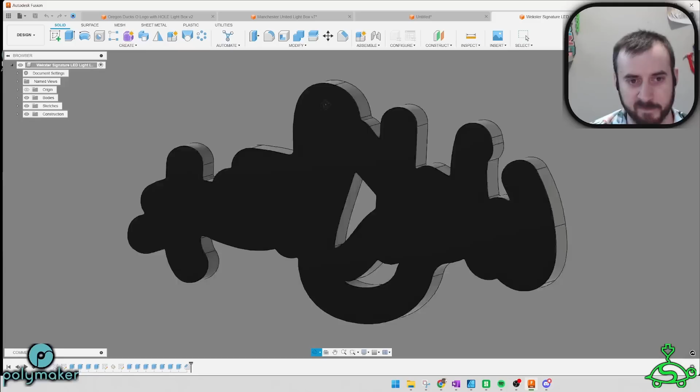The old Fusion. Here's the Wekster one, the one that I just had in my hands. You've probably seen this one from me, or there's another guy that's made one as well, basically identical to this.

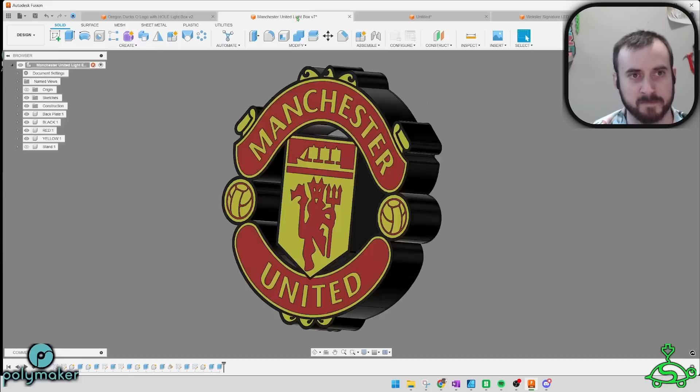And then the Oregon Ducks O - this is a pretty basic one, kind of similar to how I'll show you to make one today. This one, the Manchester United, was a royal pain in the butt because of the tolerance issues, and the more of these jagged edges, the harder it's going to be to get everything nice and perfect.

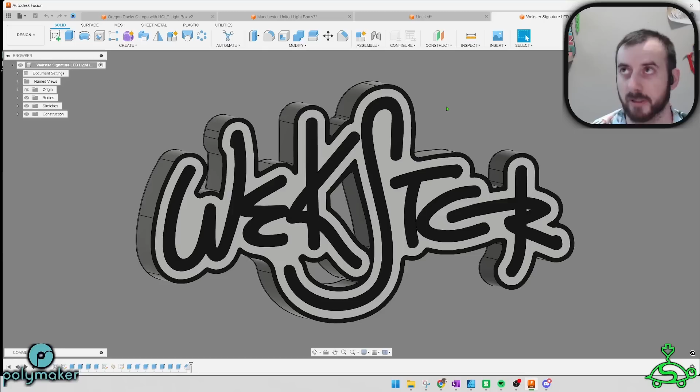So this may be a little more advanced - probably a new beginner on Fusion is not going to have fun doing this. I am going to show you how to do it on a very basic model though. This one was also not that easy, but it wasn't crazy hard. You'll be able to manage it if you really want to.

Let me show you this once again so you can understand what we're trying to accomplish here. What we want to do is essentially make the box a tunnel. In this one, you're going to have three quote unquote boxes - the outside box, this inside box, and then this inside box. If I take the back off and flip it around, you can see there are 3 boxes. I'm calling them boxes, but you know what I mean - 3 sets of walls: outside wall, this inner wall right here, and then the inner wall right here.

You need these to go all the way through, or else you're going to have light shining all over right here, and you're going to be able to see your LEDs, and it's going to look super weird. So this is the goal - to make a full pass-through light box.

And then this is the back plate, what it looks like. You'll have your normal lip on the back side, and then you'll also have lips for the boxes on the inside that you need to seal up. Trying hard to get this thing centered up in the camera, but this is what we're going for. So I'll show you a much easier, simplified way to do that.

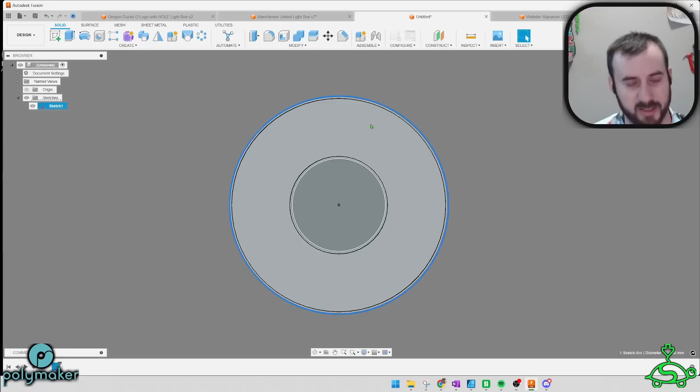This is basically just some circles I drew - this is just an example. And the biggest circle you want to go is 235 on the Bambu, because that's about the biggest you can get away with without getting into the calibration lines and such.

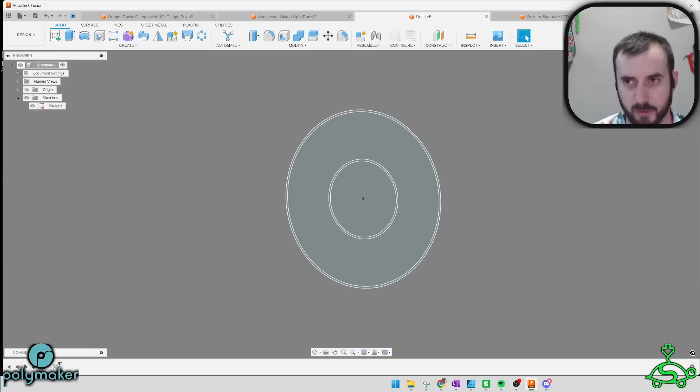So what we're going to do, I guess, is start out with the back plate first. I don't remember what I did first on the other ones that I showed you, if I did the back plate first or the front first, but we'll do the back plate first. So I'm going to select everything just like we do the normal light box, and then I'm going to hold shift and click the center because we're not going to extrude this center part.

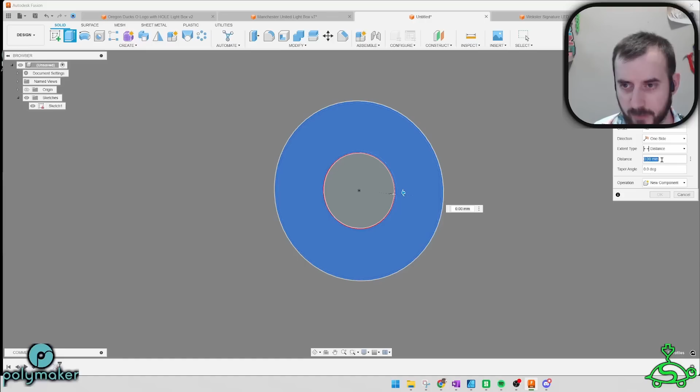I'm going to click E for extrude, and now we are ready to extrude. Then just like the regular light box, we're going to go offset and send it backwards 40 millimeters, so minus 40.

Then we're going to go new component and make this 2 millimeters thick. So this is the normal back plate, and we're going to name this back plate. Now we're going to turn the sketch back on.

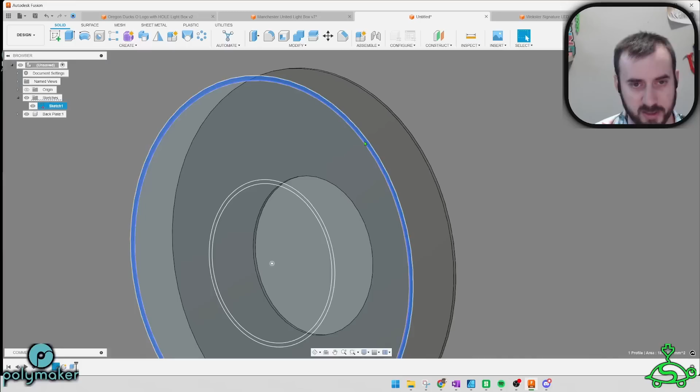I'm going to extrude my two walls just like I would a normal light box. I'll click the outer wall, hit extrude, the inner wall, hit extrude, and then go minus 38. Then I'm going to do new component. So minus 38, new component, click OK.

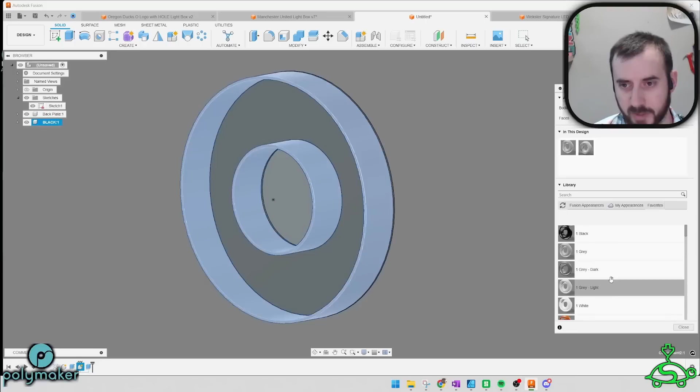This one we're going to name black because that's what color I want it to be. I'm going to scroll over here, drag my black material onto it, and get rid of the gray altogether.

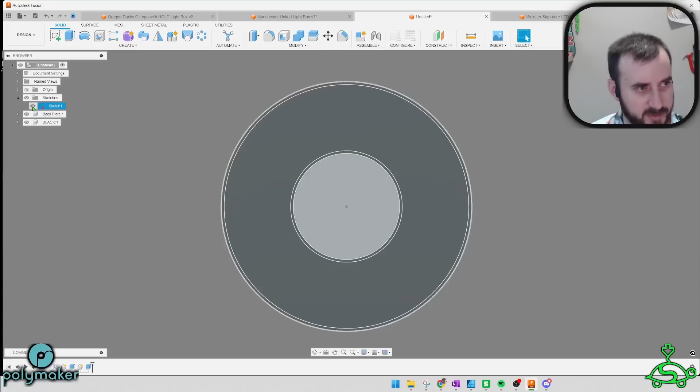Okay, so now we have the two boxes and then the back plate. So now we need to start making the lips for the back plate. I'm going to turn off sketch 1, which is at the front.

I'll turn it to the side so you can see the back plate behind here. I'm going to turn off the back plate. Yet again, just like the normal light box, I'm going to flip it around, click on the back side, and create sketch.

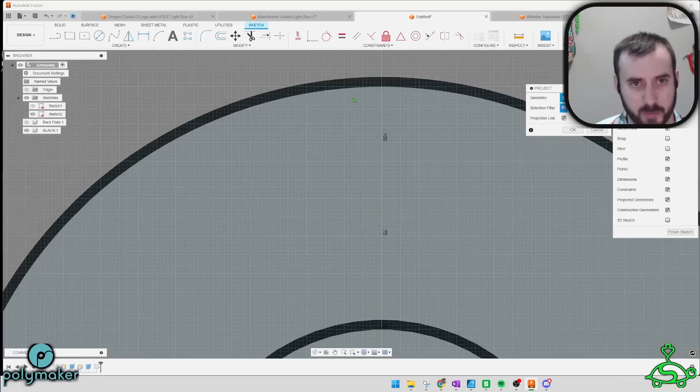Normally we're going to hit P for project, click this one, and we also have to click the inner box, so we have two. Now this is where you do your offset, so we'll click O for offset. We're going to do minus 2.5 so it goes to the inside, click enter, and then do the same offset for the other box, so 2.5.

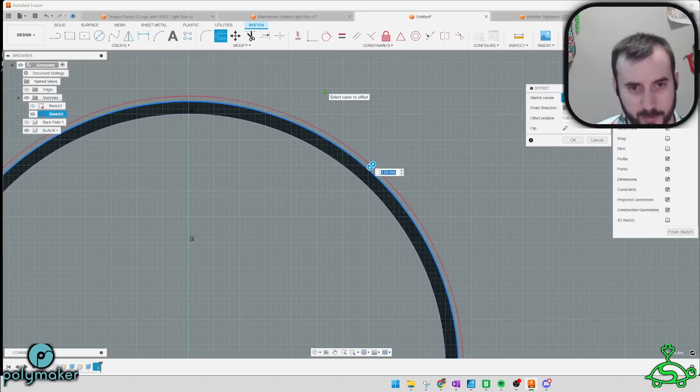So now we have our lip and lip for the back plate. Now we can finish sketch, and now we can turn off the black.

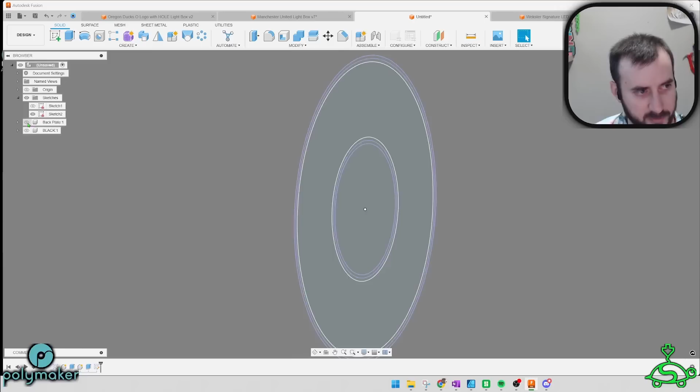Let me twist it to the side so you can see. We can turn off the black now that we have the sketch completed. Turn off the black, turn on the back plate, flip it back around to the front. And now we have our lip. I'm going to click extrude, and then we have our lip for this box.

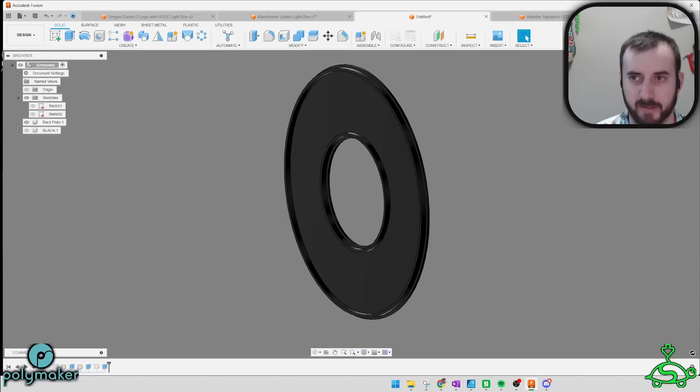And then minus 5, and we're going to want this to join. Okay, so now we have our two lips that are going to hold this light box into place.

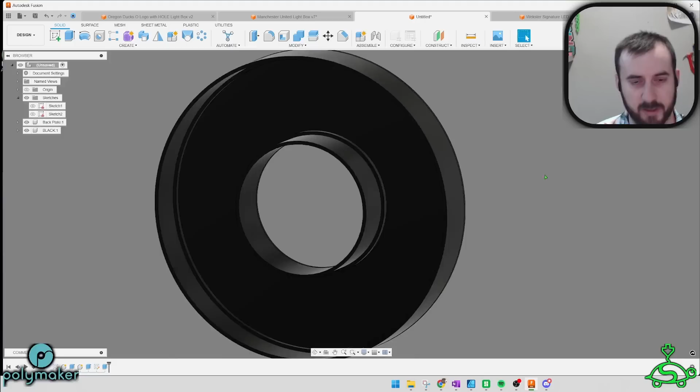So now I'll turn the black back on. You can see where this is going to slot in, so that'll be a smooth, flush inner diameter, and then it's going to be a flush outer diameter. If I flip this around, you can see it's nice and flush all the way around.

So now we have the back plate completed. We no longer need that visible. And now we can look at the front again, and now we can go back to doing whatever our design was.

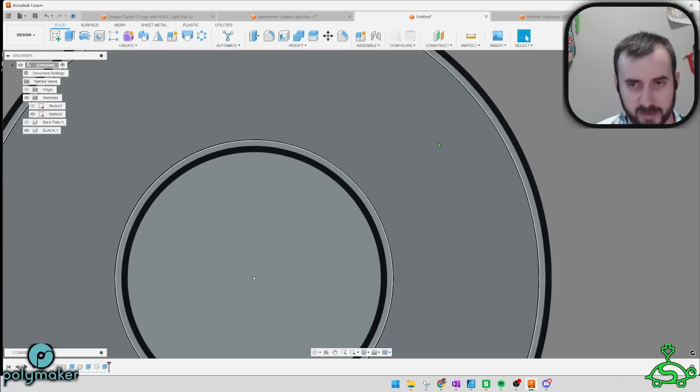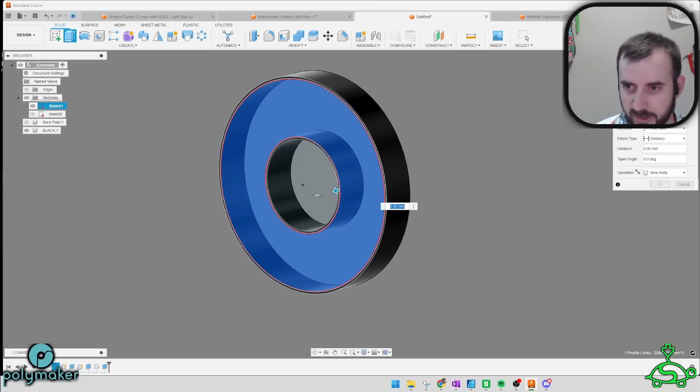So if this is just going to be a blank white design, we're going to click... Oh, I need to sketch 1 back. Sorry about that, sketch 2 is for the back plate. So I need to hide sketch 2, bring sketch 1 back into play, and we're going to click it. I'm going to go extrude, and then I'm going to go new body, minus 1.

Okay, and now this is going to be white. Now I need to hit A for appearance. I didn't say A earlier whenever I was coloring this, so hit A for appearance.

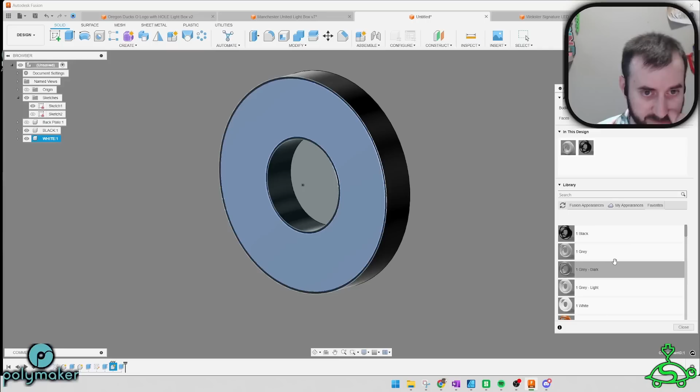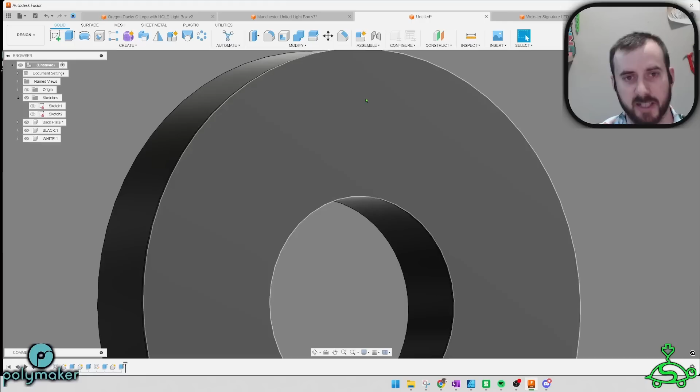Now we have basically a completed light box already. If I turn off that sketch, turn on the back plate—I don't have the wall hanger, the keyhole in the back of this, but you can put that in there anytime. But essentially you have a light box with a pass-through in it now. Just that simple.

And there it is, the donut light box. So now what you could do after this, if you don't already have a design on here, click on the front, create sketch. I'm just going to wing it from here. This isn't part of the pass-through tutorial, but I'll show you how to add stuff on here.

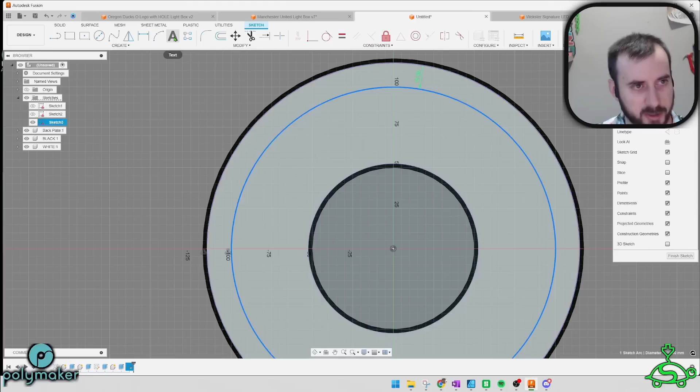Let's do Shurdle3D is where it be. Okay, now you can align these however you want.

If you wanted it to be lined up in the center, there's multiple ways you can do this. You could just simply force it like that. And you can see this line going across here, I have it perfectly right in the center.

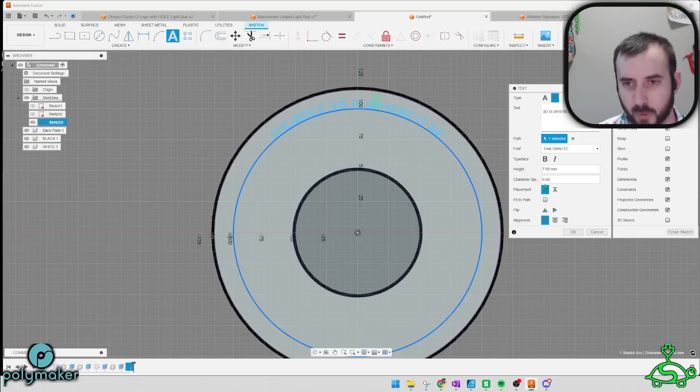Or if you want this text on the bottom of the circle, you can click this button right here. Bam.

There you go. So now you can also resize the text. Oh, that's a little large. Let's go 15 millimeters, that's pretty good right there.

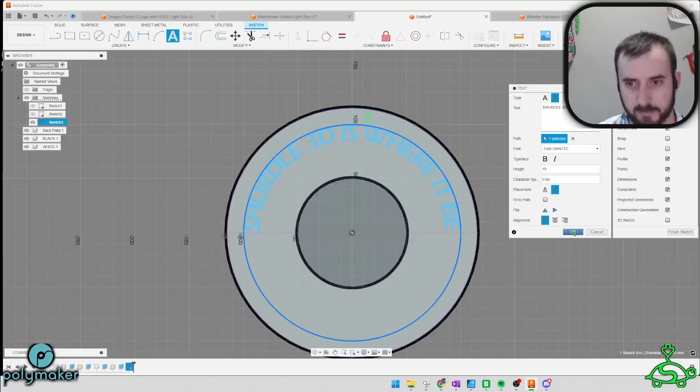We'll hit OK, finish sketch. And now what we can do is take this, extrude it, -1. We're going to cut it out.

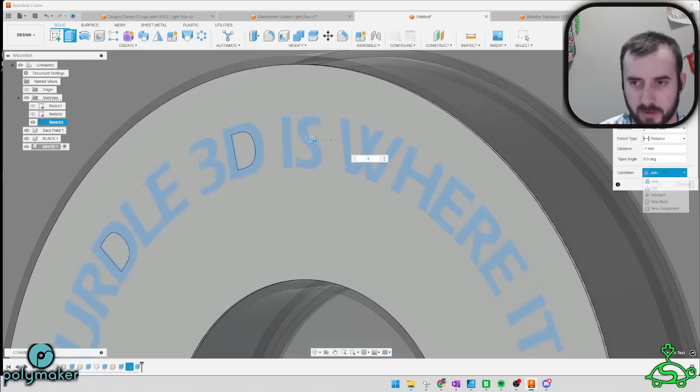Okay, turn the sketch back on. We can extrude this, -1 again. And we're going to go new component. We're going to call this text. All right, now I can turn the sketch off, and now we have a wheel with your text on it.

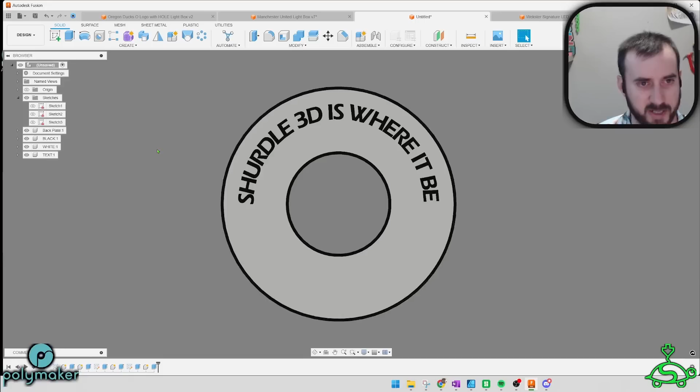And now all you got to do is just export these files into your slicer and then hit print. But in a nutshell, this is how you make a pass-through light box. This is the super duper easy version to do that.

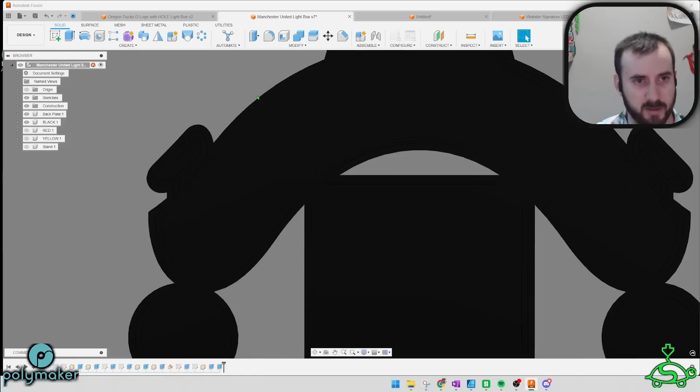If you want to come over here and compare yours to this Manchester United one, let's hide the red, hide the yellow. You can see how many walls I have and that I was fighting. This was not simple, it took me a couple of tries to get this one done correctly.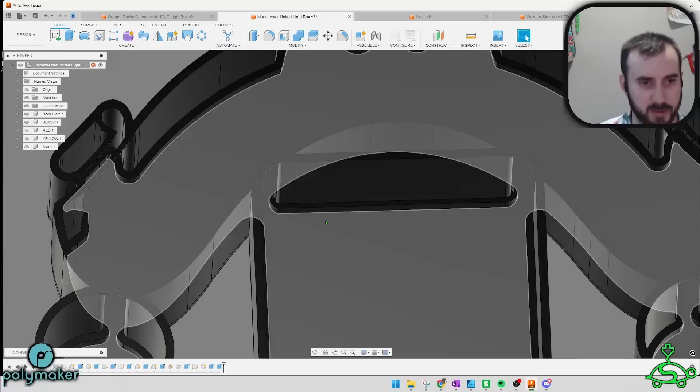You can see the lips everywhere, and then trying to get, you can see where I changed. I have a gap in the middle right here because I was fighting the fitment issues on some of these areas. So if your light box walls are too tight, that's one thing you can do is just change the width, your tolerance on the inner walls.

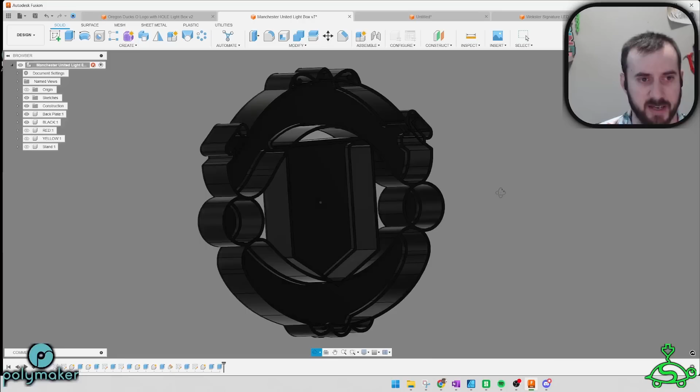You want to leave the outer walls perfectly snug. That way, whenever you slide it on there, it's nice and tight and will hold itself in place. But the inner walls, you can make the lip a little bit larger. That way there's no light bleeding through the backside, like so.

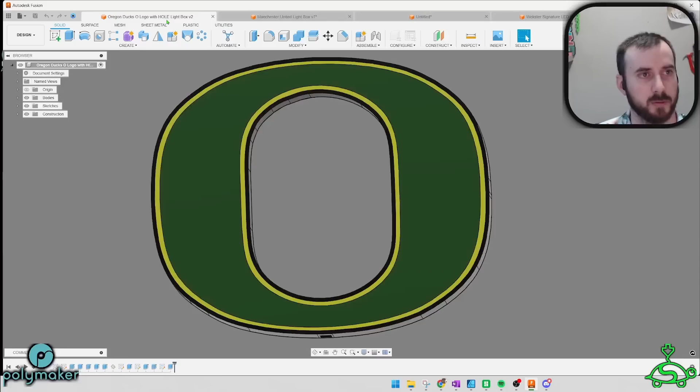Okay, so Oregon Ducks, I'll show you what this one looks like. Turn off the yellow, turn off the green. Now you can see, very similar to how I just showed you on the tutorial.

So that is how you will make a light box with a pass through. And that is about it.